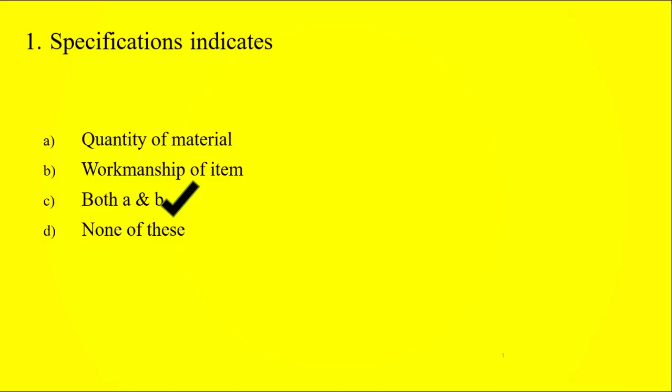Question number 2. The cost of a unit quantity of work is known by its: option A contractor, option B owner, option C specification, option D none of these. The right answer is specification.

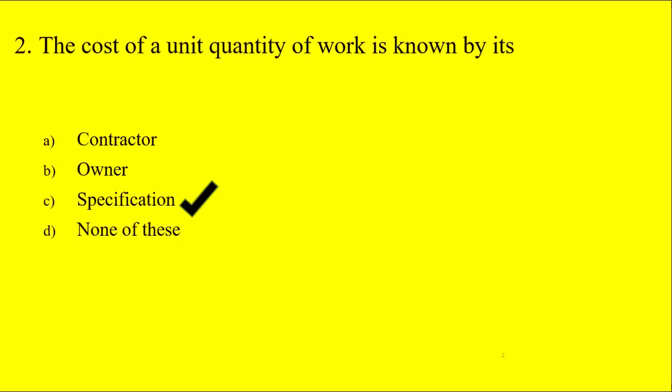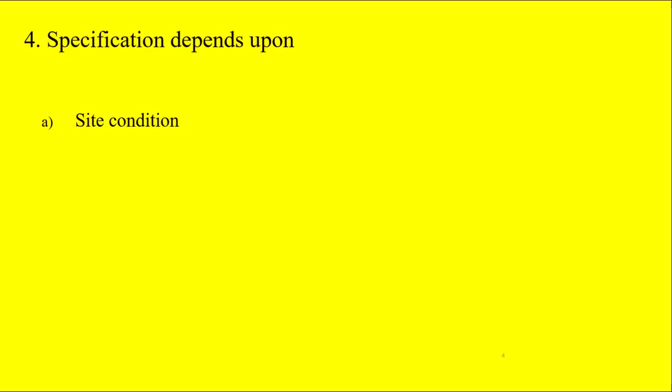Question number 4. Specification depends upon: option A site condition, option B nature of work, option C purpose for which work is carried, option D all of the above. The right answer is all of the above.

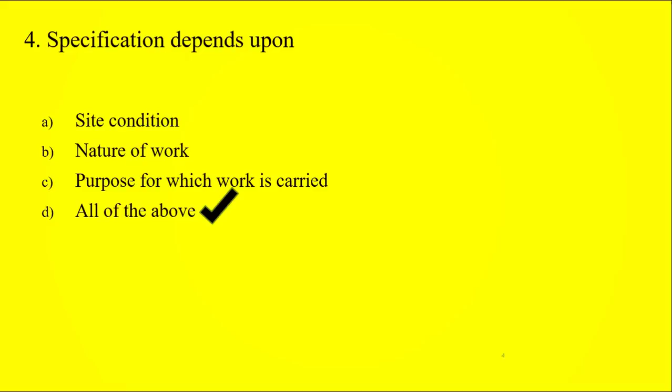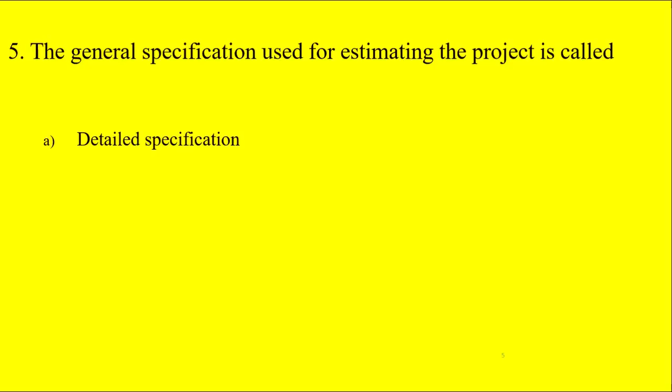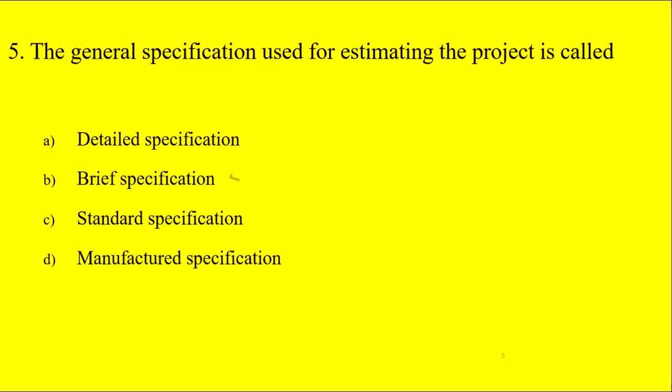Question number 5. The general specification used for estimating the project is called: option A detailed specification, option B brief specification, option C standard specification, option D manufactured specification. The right answer is brief specification.

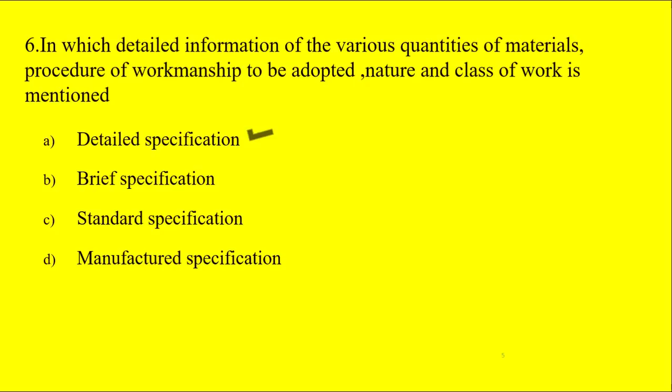Question number 6. In which detailed information of the various quantities of material, procedure of workmanship to be adopted, nature and class of work is mentioned? Option A detailed specification, option B brief specification, option C standard specification, option D manufactured specification. The right answer is detailed specification.

Question number 7. In which the properties of products such as strength, thickness, depth, elasticity is mentioned? Option A detailed specification, option B brief specification, option C standard specification, option D manufactured specification. The right answer is manufactured specification.

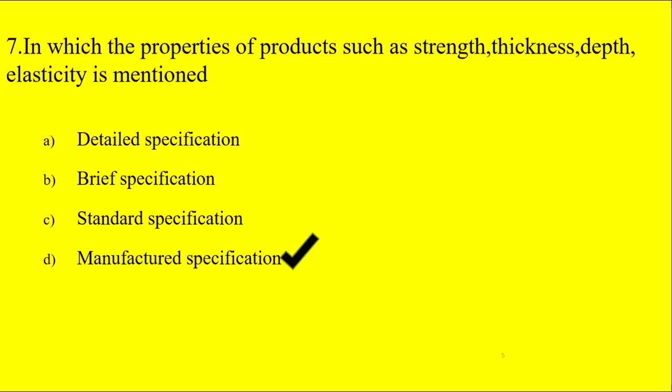Question number 8. Which corporation makes the standard specification? Option A MSEB, option B MIDC, option C PWD, option D all of the above. The right answer is all of the above.

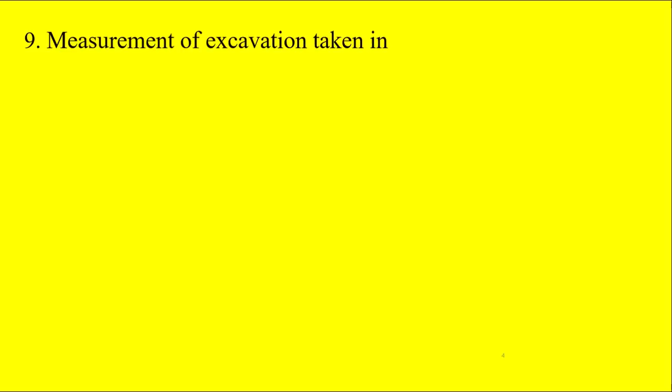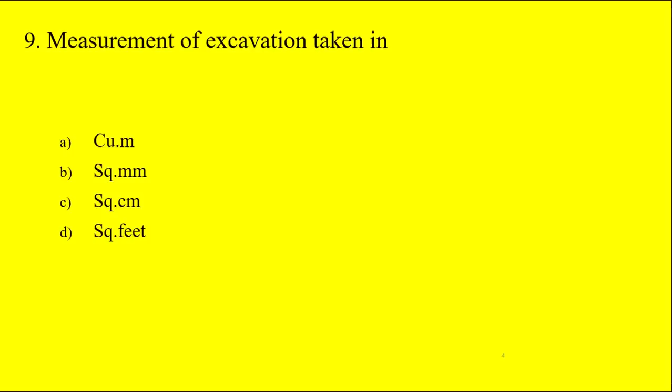Question number 9. Measurement of excavation taken in: option A cubic meter, option B square mm or mm square, option C centimeter square, option D feet square. The right answer is meter cube or cubic meter.

Question number 10. Separate extra rate shall be applicable for every extra lead of: option A 10 meter, option B 20 meter, option C 30 meter, option D 40 meter. The right answer is 30 meter.

Question number 11. Separate extra rate shall be applicable for every extra lift of: option A 1 meter, option B 1.5 meter, option C 2 meter, option D 2.5 meter. The right answer is 1.5 meter.

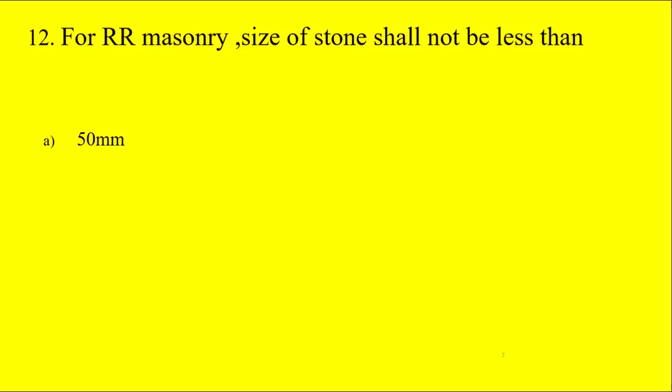Question number 12. For RR masonry, size of stone shall not be less than: option A 50 mm, option B 75 mm, option C 100 mm, option D 150 mm. The right answer is 150 mm.

Question number 13. For RR masonry, thickness of joint shall not be more than: option A 20 mm, option B 30 mm, option C 40 mm, option D 50 mm. The right answer is 20 mm.

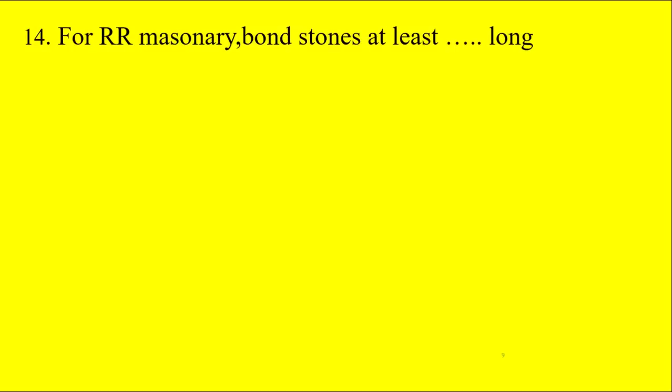Question number 14. For RR masonry, bond stones at least shall be: option A 300 mm, option B 450 mm, option C 400 mm, option D 350 mm. The right answer is 450 mm.

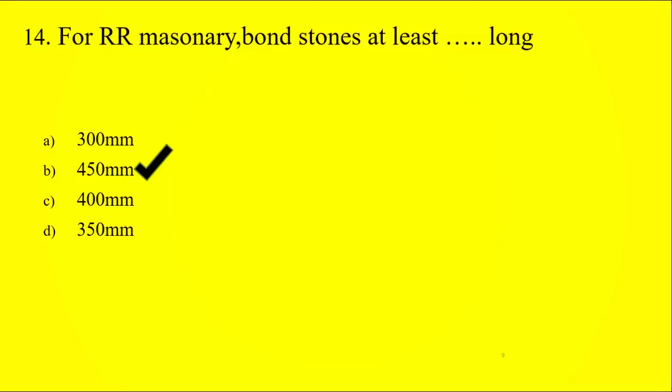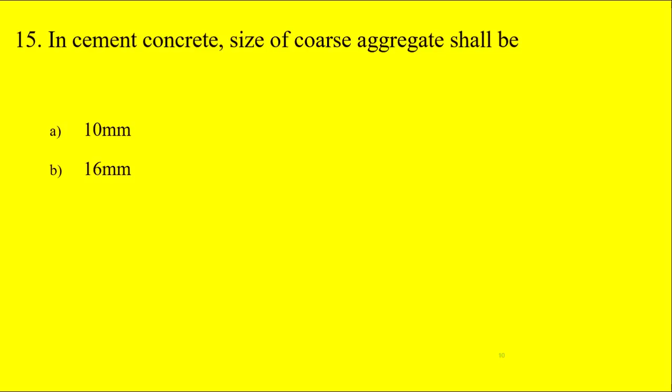Question number 15. In cement concrete, size of coarse aggregate shall be option A 10 mm, option B 16 mm, option C 20 mm, option D 25 mm. The right answer is 20 mm.

Question number 16. Size of coarse aggregates being used for building work: option A 20 mm, option B 40 mm, option C 60 mm, option D 80 mm. The right answer is 20 mm.

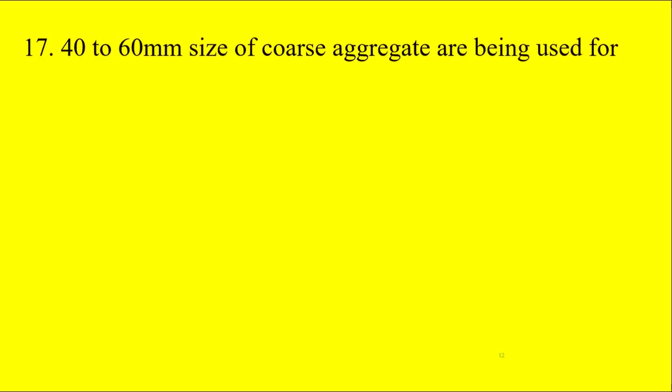Question number 17. 40 to 60 mm size of coarse aggregate are being used for option A building work, option B road work, option C mass concreting work, option D none of these. The right answer is mass concreting work.

Question number 18. In cement concrete, fine aggregate shall pass through sieve of dash square mesh. Option A 20 mm, option B 15 mm, option C 10 mm, option D 5 mm. The right answer is 5 mm.

Question number 19. In cement concrete, proportion of concrete shall be option A 1:2:4, option B 1:1.5:3, option C 1:2:3, option D 1:1.8:2.5. The right answer is 1:2:4.

Question number 20. For 7 days, the minimum compressive strength of cement concrete 1:2:4 shall be option A 21 Newton per mm square, option B 14 Newton per mm square, option C 28 Newton per mm square, option D 42 Newton per mm square. The right answer is 14 Newton per mm square.

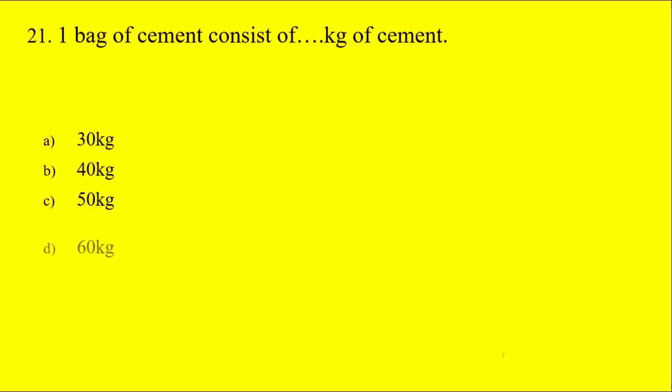Question number 21. One bag of cement consists of dash kg of cement. Option A 30 kg, option B 40 kg, option C 50 kg, option D 60 kg. The right answer is 50 kg.

Question number 22. For machine mixing, what is the required quantity of water per bag of cement? Option A 10 to 20 liter, option B 25 to 30 liter, option C 30 to 40 liter, option D none of these. The right answer is 25 to 30 liter.

Question number 23. For building work, slump of dash mm should be permitted. Option A 20 to 30, option B 30 to 40, option C 75 to 80, option D 75 to 100. The right answer is 75 to 100.

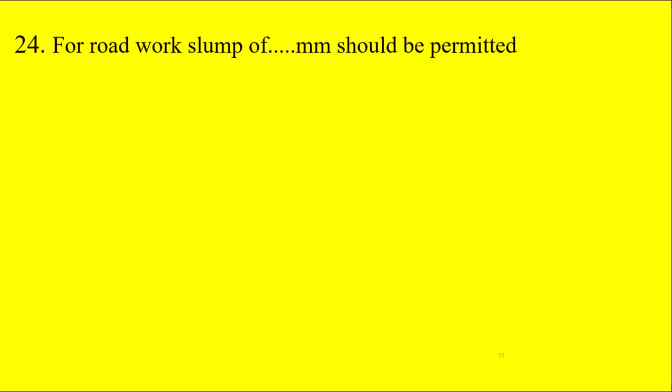Question number 24. For road work, slump of dash mm should be permitted. Option A 20 to 30, option B 50 to 75, option C 75 to 100, option D 30 to 40. The right answer is 30 to 40.

Question number 25. Forms at the bottom surface in case of beam and slab shall not be removed before option A 14 days, option B 21 days, option C 28 days, option D none of these. The right answer is 14 days.

Question number 26. For first class brick, compressive strength shall not be less than option A 12.5 Newton per mm square, option B 15 Newton per mm square, option C 10.5 Newton per mm square, option D 17.5 Newton per mm square. The right answer is 10.5 Newton per mm square.

Question number 27. Brickwork shall not be carried out more than option A 1 meter, option B 0.25 meter, option C 0.5 meter, option D 0.75 meter. The right answer is 1 meter.

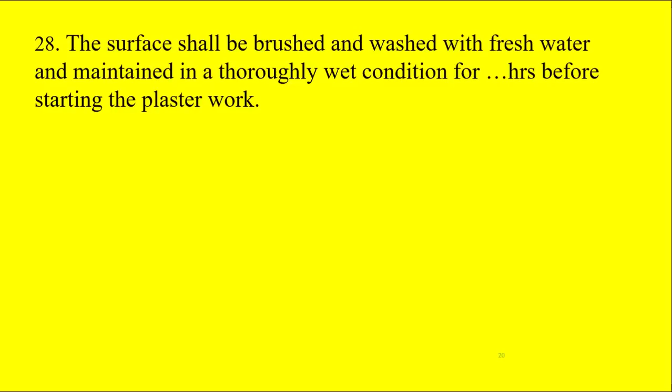Question number 28. The surface shall be brushed and washed with fresh water and maintained in a thoroughly wet condition for dash hours before starting the plastering work. Option A 5 hours, option B 10 hours, option C 24 hours, option D 12 hours. The right answer is 24 hours.

Question number 29. There shall be at least dash days interval between application of the first coat and finishing coat. Option A 1, option B 2, option C 3, option D 4. The right answer is 3.

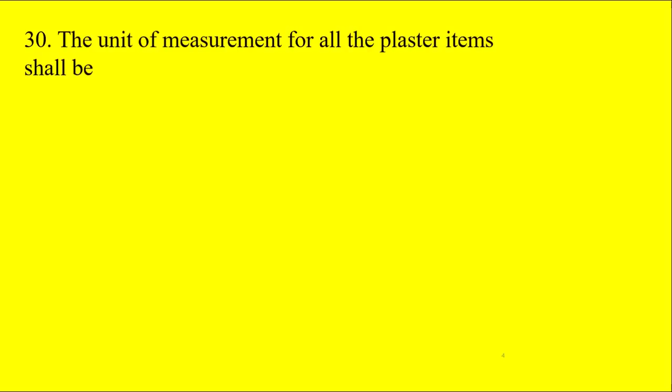Question number 30. The unit of measurement for all the plaster items shall be option A square meter, option B square centimeter, option C square mm, option D none of these. The right answer is square meter.